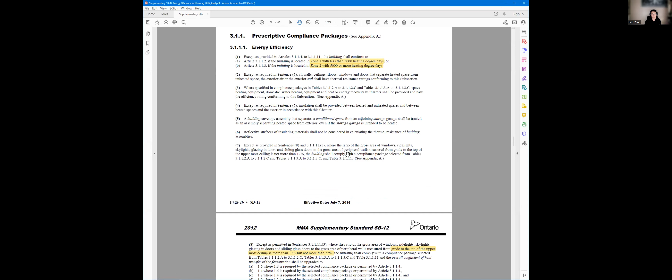All right, so let me talk to you about chapter 3. Chapter 3 is acceptable solutions for energy efficiency compliance after December 31st, 2016. So any permit that you submit to the city after December 31st, 2016, you need to adhere to chapter 3 of this document, which is the SB12 document.

Now, depending on where your house is located, you need to figure out whether it belongs to zone 1 or zone 2, because the first sentence here, Article 3.1.1.2, the building location, says there's 2 zones in Ontario: less than 5,000 degree days or more than 5,000 degree days. If you don't know what heating degree day means, you should Google it. The quick answer is basically how many degree days it's related to heating.

So in Ontario, like in Toronto, the heating degree days is about 3,500-ish. But if you go to like Sudbury or Thunder Bay, it's going to be over 5,000. So that's the determining factor for you to locate whether you're zone 1 or zone 2. Now, why is this important? Because if you're up north more, it means that it's colder. It means you need to use more energy to keep the house warm.

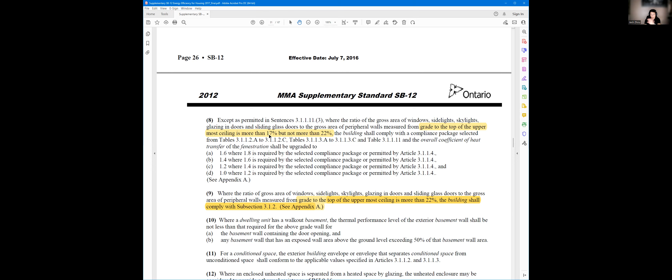That's what you need to understand in this chapter. I highlighted this because it's one part that a lot of architects get confused about. You'll understand what these values are later on, but let me plant a seed here: if you build a house that has between 17 and 22% window to wall ratio, you need to increase the performance of your window. All right, that's the first requirement.

Now, the second sentence I highlight here is: if you design a house that has over 22% window to wall ratio, then you have to do energy modeling. You cannot do the prescriptive path. We'll cover that on day two, not today. Has anybody done a house that's more than 22% window to wall ratio?

Yeah, I did one. Okay, so you had to use an energy modeler to comply, correct? Yeah, exactly, he used these things. So that's the reason why, because this is where it's saying that, all right? I just want to let you guys know. Now I'm going to start going through more requirements here.

Now sentence 17 is also very important. Anybody who built up north where they use a wood stove as a heating system, or a geothermal system, or an air source heat pump system that has a natural gas backup -- if you use any of these systems I just mentioned, you can use any of the compliance packages I'm about to show you to meet compliance. So has anybody designed a wood burning appliance or used a geothermal system in the past?

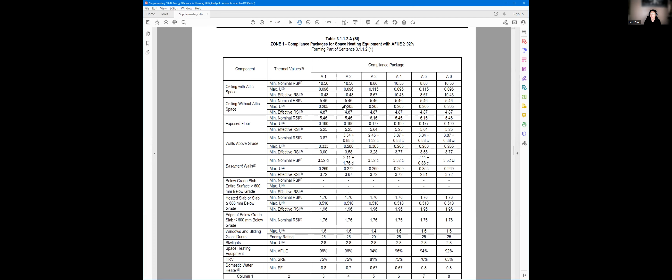Which table do you guys prefer to use? Imperial? Everyone okay with imperial? I think there's a mix, so maybe we can go over both, okay, right?

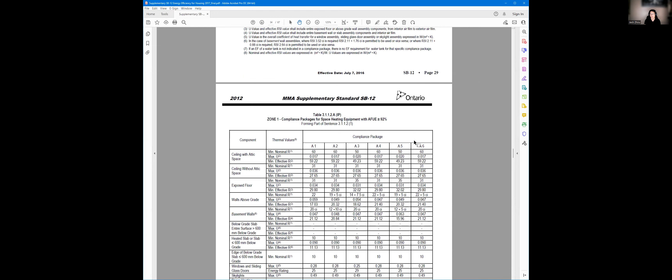So I just want to let you know that there's two tables here. One is SI, which is metric, and then the next one is the same table, but it's in imperial units. So let me just go through this table one by one. Once you learn how to read one table, you'll be able to read the whole table. So let me just walk you through this one at a time.

So most builders in Ontario, I mean like 90% of builders in Ontario, they comply with the A1 package. It's simply because A1, which is this package here, where it says walls above grade, this is the only location that does not have something called CI. So what is CI? CI stands for continuous insulation. Just remember that for now.

So let's look at how this table is set up. When you're building your house for the purpose of meeting SB12 requirements and you're in zone 1, you can comply with this building code requirement using 6 packages: A1, A2, all the way to A6. In order for you to comply, you have to do everything within the one column. You cannot pick and choose. If you're going to go with A1, everything of A1 you have to do in terms of meeting compliance. You cannot pick and choose.

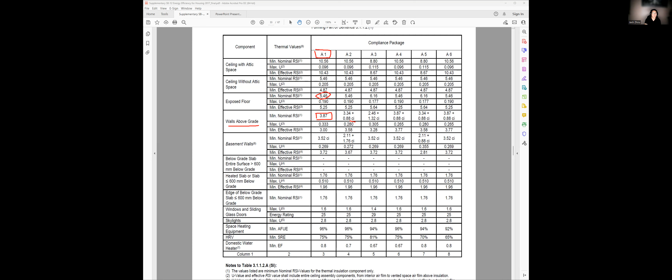Okay, Sam, go ahead with your question. Just to confirm, when you said you can choose between A1, A2, A3, is it up to the architect to choose which package? Yes, or your client.

But you have to make sure that your zone is correct. You can't just pick, so that's why the first thing is you need to know your zone. And this one is for the zone with space heating equipment at 92%.

Now here you see in the basement wall, again you have 3 options, but every package has something called continuous insulation.

So your basement has to have continuous insulation around the whole basement walls. And that can be outside the basement or inside the basement, but it has to be there. So this is R20, which is RSI 3.52 everywhere.

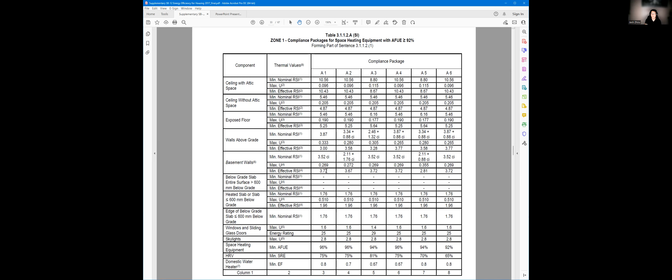Under the building code, have you guys ever built a house where they finished the basement? Yeah. Yes. So in a finished basement, what they usually do is they'll do R10 plus a 2x4 with an R12 batt. So that's what number 6 says. Basically, under the A1 package, you could either do this or you can do this. These two are interchangeable. It's either one. And that's what note number 6 says.

So because this is RSI 3.52, right? You see that? You could replace that wall with RSI 2.11 plus 1.76 CI. So this is the only time where you're allowed to change these two if you want to. And you do not need to get a building permit for that. Can you explain what that means though? 2.11 plus 1.76 CI. Yeah.

So RSI 2.11 is about R12, like an R12 batt in the frame. RSI 1.76 CI is actually R10 continuous insulation. That's what that means. So this first number relates to the insulation in the frame cavity. The second number refers to the continuous insulation requirement. Yes, we have a question.

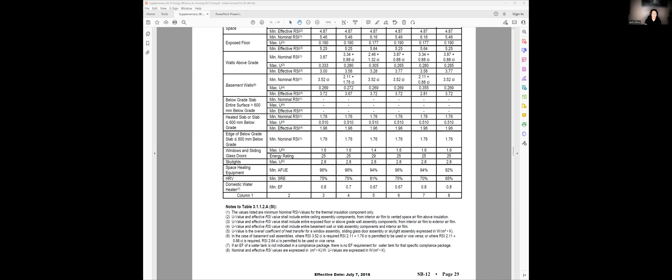Could you please go to the second schedule, the imperial? This here. Yeah. Sometimes when we send to the cities for the basement, we have R12 existing, and we add an R10 between the new studs. Does that mean the 12 plus 10 that you highlighted? No, that is not. So R12 plus 10, this R12 here refers to the batt insulation within the frame cavity. This R10 refers to insulation outside of the frame, which is continuous insulation.

So is that stuck on the wall? That's correct. That's the rigid insulation that you put on the wall, and then you do the 2x4 in front, and then you do the R12. Oh, so both are required. Sorry? Both are required, the rigid insulation and the insulation between studs. Yeah, both are required.

All right. Yeah, but in this here, this R20 CI is just an R20 blanket. And that's what most production builders use because R20 blankets are very, very cheap. The cost to do an R20 blanket is about $1 a square foot. That's it. Very cheap. This here is almost like $2.50 per square foot. That's why most builders I know use R20 CI. All right, I'm gonna move on to the next section.

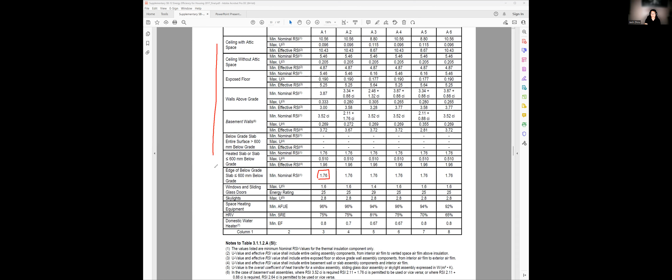So that's what this is. This is where the edge is. The edge refers to where the slab is touching the footing. Okay, I think the horizontal one is the more used, correct? Yeah, that one's more used because it's easier to do. But again, there's a requirement for it. It's R10. All right, so this section covers the insulation and the building envelope of your house.

Now this is where it starts to be interesting, because for windows there are 2 ratings you can comply with, 1 or 2. You can use max U and energy rating. These 2 things are completely separate metrics of window compliance. There's no correlation between them. So for this window, I can either meet U 1.6 or an energy rating of 25. You don't have to meet both, just either one.

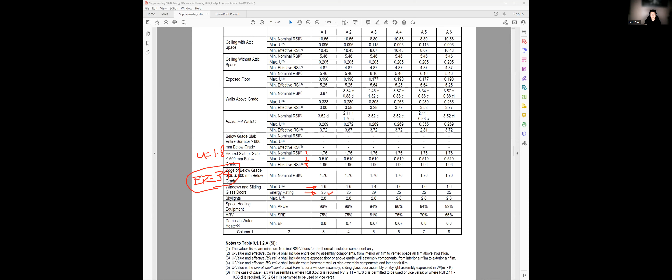Similar to these, it's 1, 2, or 3. You do not have to meet all 3, just either one. So here is where it's very interesting. You can have a window with an energy rating, called ER, of 34, and the U value could be 1.8. But because the energy rating is 34, it will comply with the ER rating and you're compliant. Even though the U value of 1.8 is worse than 1.6, you're still okay because you meet it using the energy rating.

Now, hold your thought for a second, because I'm going to tell you what table that is. It's down here, just give me 1 second. You see this here? Table 3.1.1.9, maximum U and minimum energy rating for windows, skylights, and sliding doors.

So U 1.6 is equivalent to ER25, 1.4 is equivalent to ER29, and 1.2 is equivalent to ER34. The example I gave you earlier was ER34 with a U value of 1.8. If you look at the U value, it's this, but if you look at the energy rating, it's here. So if you had a window with this rating, you could actually say it complies with a U 1.2 rating. Any questions here? This one is very critical.

So in summary, are you saying that we either comply with the ER or the U? That's correct. And whichever is in your favor, you can pick that to help you. Because if you look at a window label and it says U 1.8 or ER 34, you can say that this window is actually equivalent to a U value of 1.6 or 1.2, sorry.

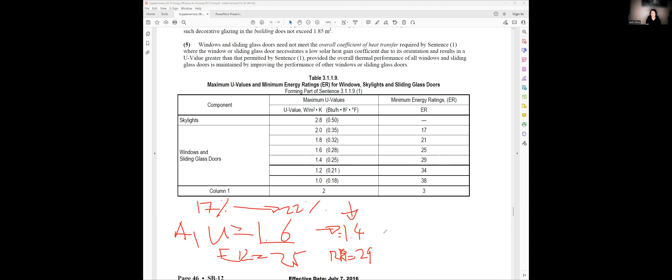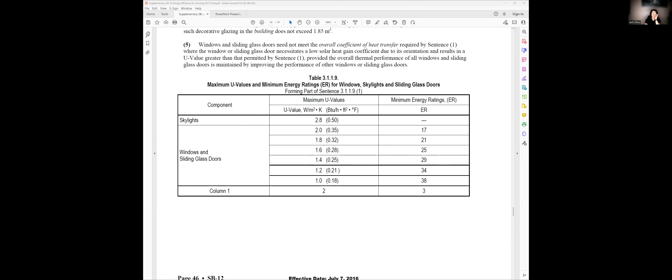What if it's more than 22%? You have to do energy modeling. Oh, yeah. So that's next week, okay? Now let me go back to the slide and we'll finish up soon.

So as I said, one hour online is very challenging, let alone trying to learn most of it, but I'll do my best and we can have more sessions. Look, what you guys are doing, Lola, you're amazing. I want to help you. So if I can, let me know. I don't want to be off the hook. So if you need help, just let me know.

Okay, so let me continue. So space heating equipment, right? Sorry, skylights. Skylights, there's only one option. It's just the U value of 0.49. That's it. You have no energy rating for skylights. It's just the U value of 0.49. So pretty straightforward.

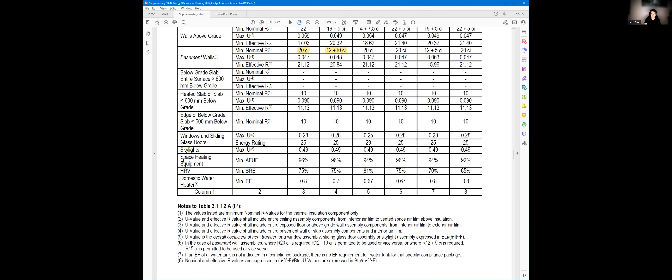For space heating equipment, oh, this is the SI, so I'll go back to the Imperial one. So space heating equipment is 96%. This is the AFUE number of space heating equipment. So this is a natural gas furnace, 96%. You cannot be 95.9%, it has to be 96%. The other thing is the HRV. You can also install an ERV or HRV, but it has to be at 75%.

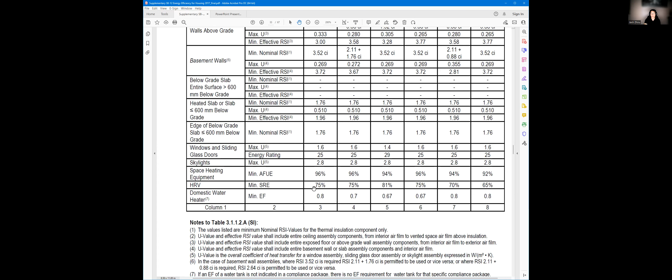Where does it say ERV though? I missed that. Okay, so going back to here. Note number 16: ventilation system serving dwelling unit shall have a heat or energy recovery ventilator. So HRV is heat recovery ventilator, and then this one's energy recovery ventilator. So they mean the same thing. Okay, so that's where it is.

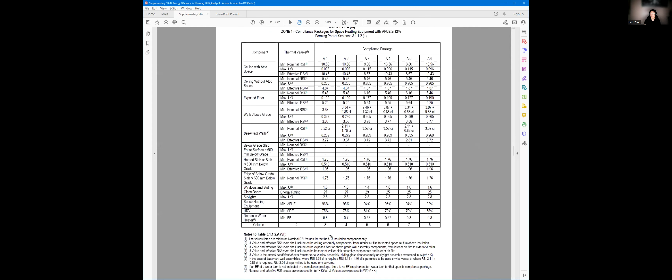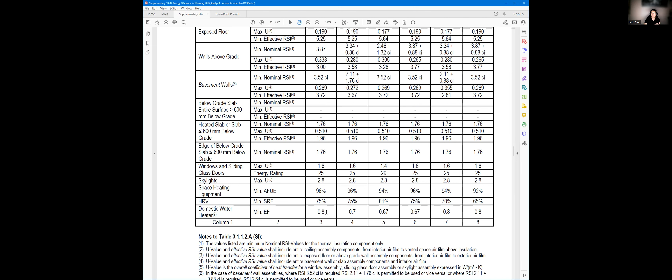And then if you're going to install a domestic water heater, it has to have a minimum energy factor of 0.8, so 0.80 basically. So that's basically how you would read the A1 package. Now that you understand how to read A1, the rest is the same understanding. You just have to understand that the first number here represents the insulation in the frame cavity. The second number represents the continuous layer of insulation outside the wall.

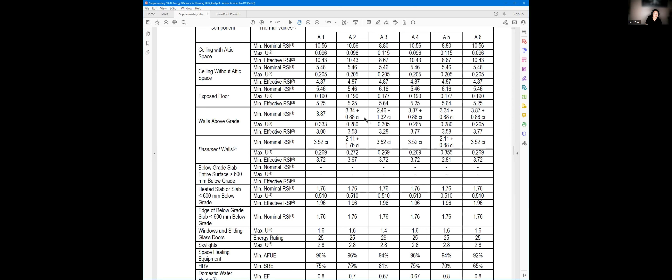So I'm going to go to the next table here. So basically for the A2 package, R60, R31, and then exposed floor, R31, they're all the same. But then when it comes to wall above grade, it is R19 plus 5. So it's a 2x6 wall with an R19 batt plus R5 exterior insulation. That's what you mean by R19 plus 5 CI.

Similarly, in the basement, it's a 2x4 R12 batt plus an R10 continuous insulation on the outside. So because you have better walls, that's why your hot water tank can be less efficient. And that's how they set up the whole table.

If you do better on your walls, your mechanical system can be worse. If you do better on your mechanical system, your above grade walls can be a little bit worse. And then depending on how your client wants to build, you can pick any of these packages. Any question on how to read these numbers?

So I guess with experience, we would know R12 is 2x4, R20 or 14 is whatever, and what these are in terms of wall thicknesses. Yeah. So I mean, that would be very basic construction. I think for people who came from other countries where they've always been using concrete as their primary building material, those will be good for them to learn more about Canadian plywood framing, right?

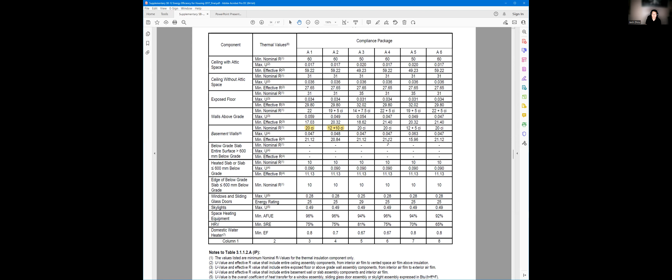Understood. So, Jack, can I ask you for a favor for the next session, please? Yes. If you can prepare like 2 cases where you ask us to calculate what's required for energy and stuff like this, we can do the calculation and try to figure out the numbers. Is that something that's possible? Sam, that would take up too much time. I think maybe he can send us something that we can work on offline and then present it to him.

Okay, so let me just rephrase the question. Do you want to learn how to calculate energy consumption using the performance path? Not really. How to get the numbers out of those tables. So maybe you can send us that this wall is from this building, it's above grade, and calculate or find the numbers. Okay, so I gave you some examples earlier. So Lola, if you can reshare them with your team. I will. Yeah, so basically this here, right? More of this example, is that what you're asking for?

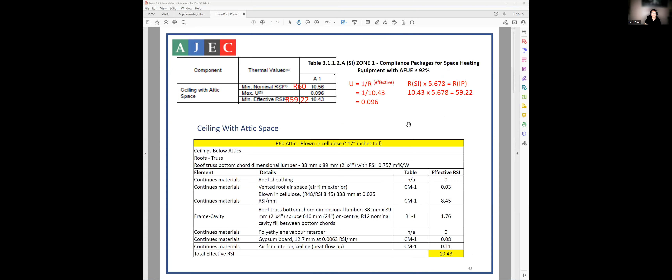Yes. I think she means if you have a wall type, like say a wall thickness, a wall type, a wall assembly, and then try and calculate which package should comply. So I have those examples given to you. We don't have time to go through them right now, but these are examples where you could find the RSI and calculate and come up with these R values.

If I can, I will share the answer key with you, Lola, just with you, and then give them some time to play around with. And then if you want, you can share with your team. That way they can learn from trying it on their own and then get the answer key.

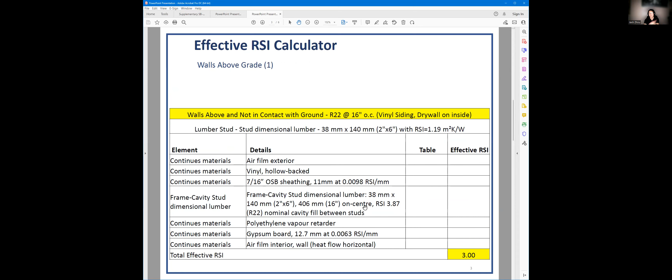Okay. This is what I make the CBOs go through when they try to learn, because when they review building permits, they also have to verify that you are doing the right assembly to comply. So I had to teach them how to do this job as a plans examiner. But for architects, I think it's too much to learn in 1 hour. This is a half a day exercise, not a 1 hour exercise.

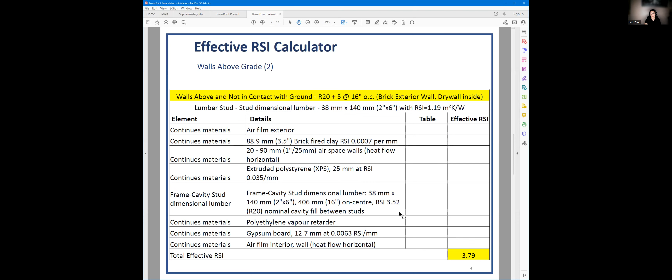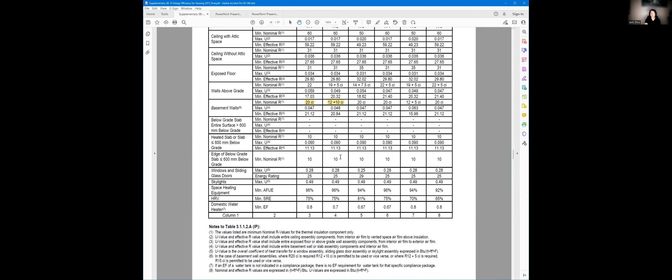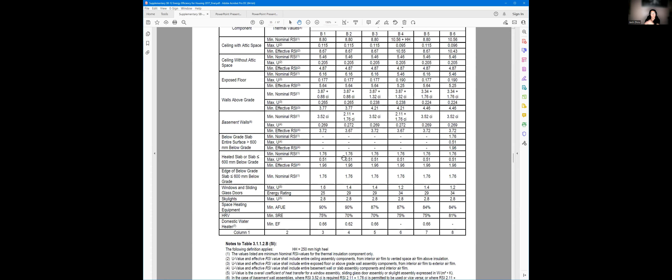Okay. Yeah. So, next week, what we could do is, all the tables, as long as you learn how to read one table, then they're all the same understanding, same logic, same everything. So it's not hard to understand. Next week we'll learn about the performance compliance, which is this table here.

It's this section here, performance compliance, because a lot of you will design houses that are gonna be over 22%, then you need to work with an energy modeler to come up with the building package. You cannot select one of those tables. And this is what I can walk you through. At least you understand the purpose, and then you can hire the right person.

Now, you don't have to hire an energy advisor to do energy modeling. You, as the architect, can also learn how to do it and submit for a permit. It doesn't have to be me. But next week, I'm gonna walk you through all the rules, 7 rules here, so that you understand what it takes to model the house properly.